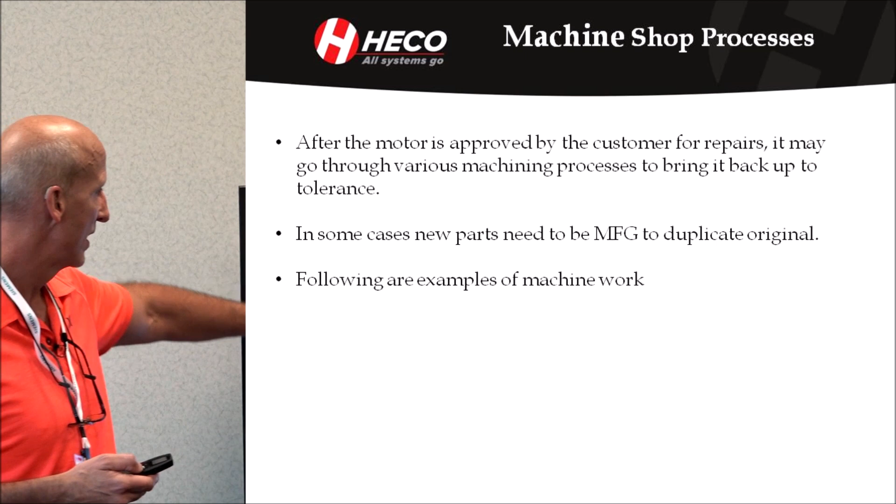After the motor's approved and cleaned, it may go through various machine shop processes. In some cases, new parts are needed. Following are examples.

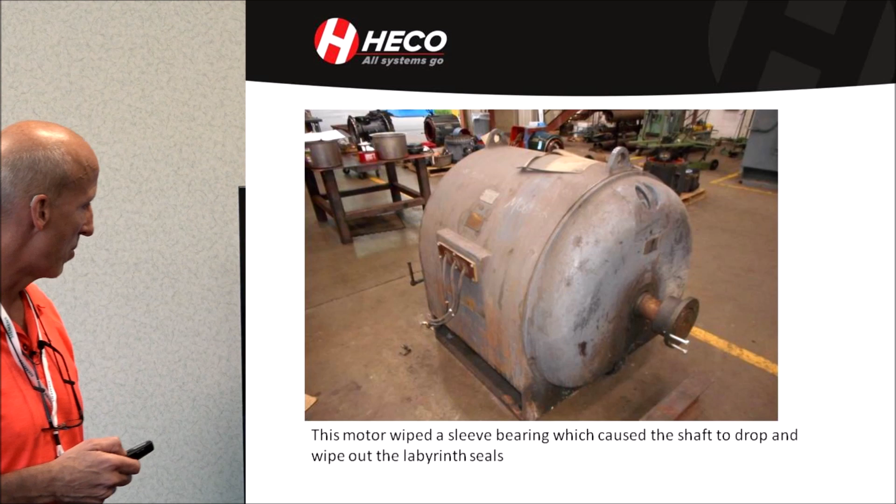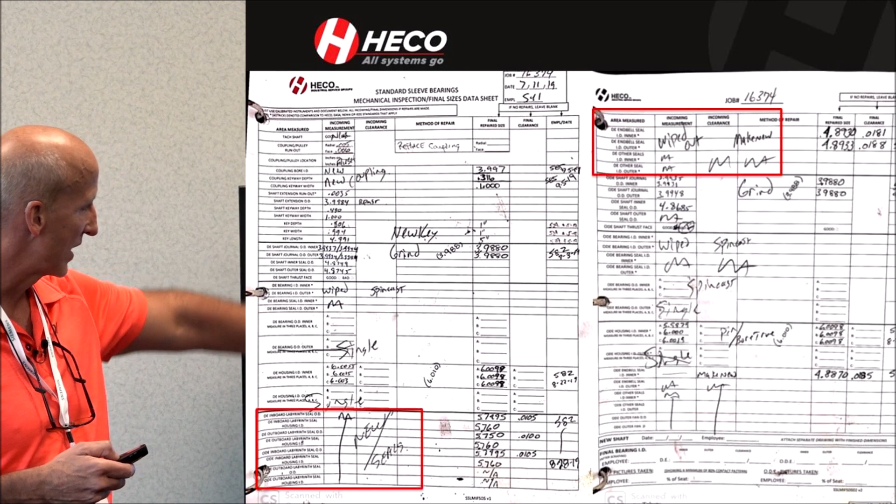This is a motor that came in with a wiped sleeve bearing. It took the seals out, and we're going to focus on that again. Documentation, pictures of the actual motor—I think it's the same motor we were looking at a minute ago. You can see where the seals are wiped.

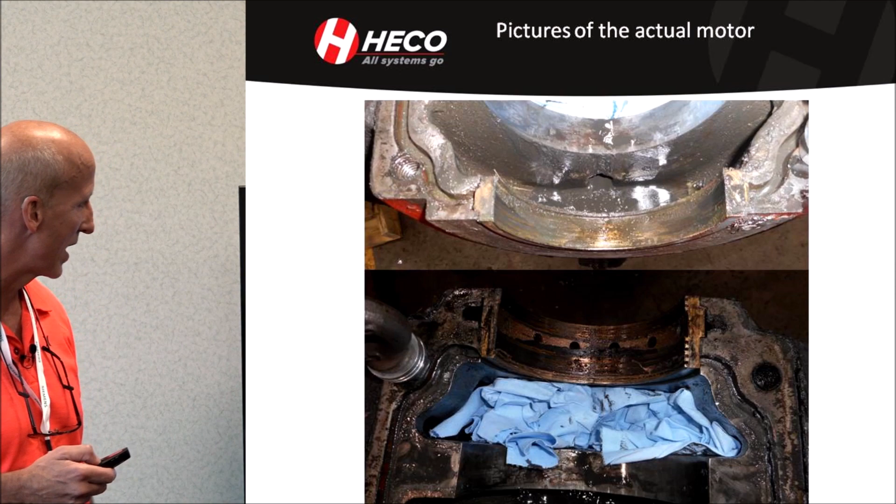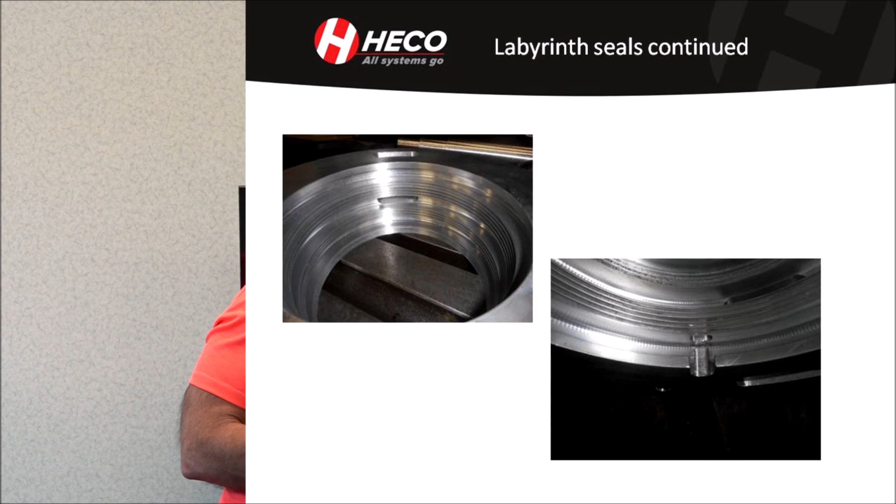Manufacturing new seals out of raw material, right down to the fine details of putting in oil return grooves and holes, so that when oil gets into the labyrinth seal, it has a way of getting out by returning back into the motor.

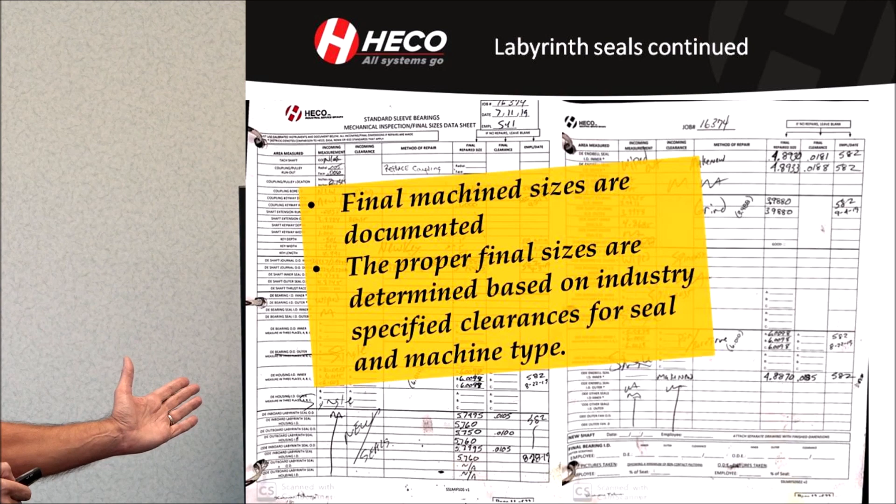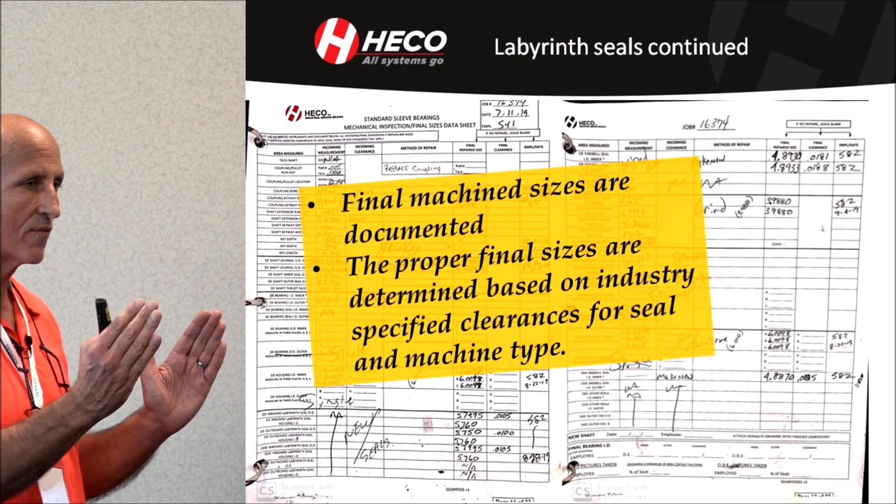Final machine sizes are then documented. On this form you have the incoming sizes, the repair method, and the final sizes. We like that because it's all on one form—it allows us to see the whole activity of the repair in the mechanical aspect.

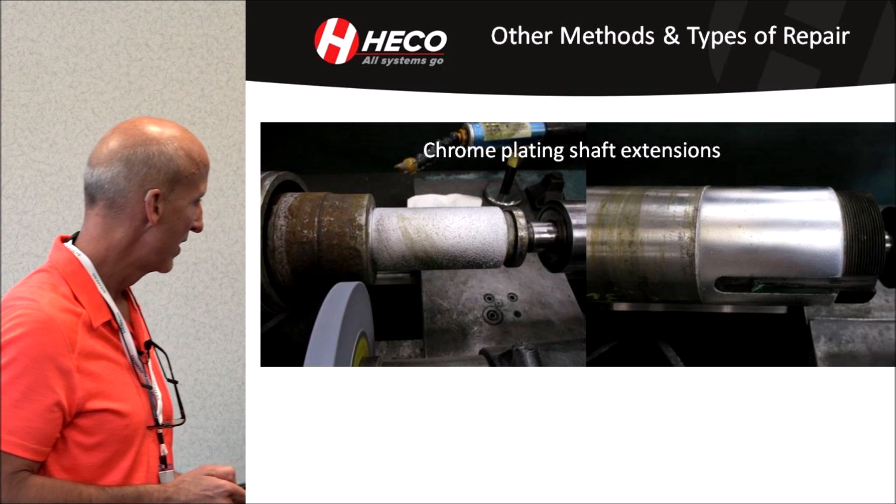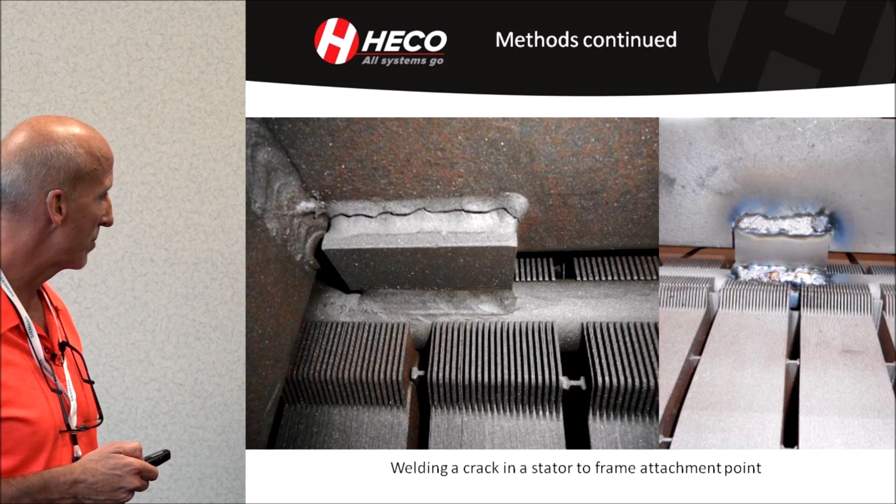Other methods of repair: we might chrome plate a shaft extension and then grind it, or repair cracks in frames—just showing some simple things we might do. Of course, identifying the materials and making sure we're following the right weld procedure is really important.

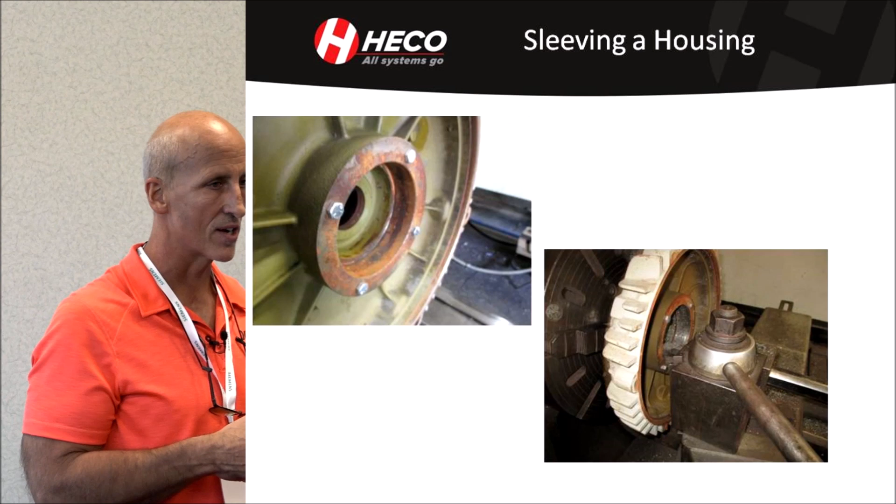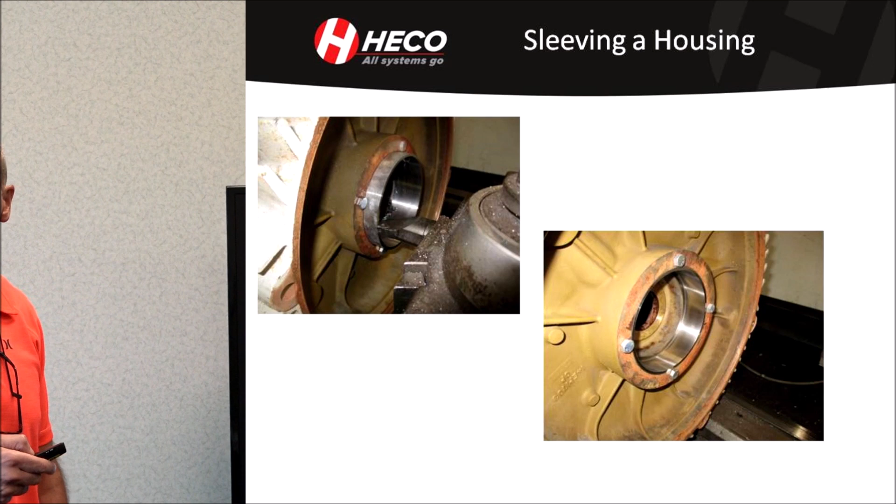Sleeving a housing is very common for us, for smaller motors and even larger ones—boring out the housing, putting in the sleeve, shrinking the sleeve in, and then cutting it to final size, to the bearing tolerance charts predefined by the bearing manufacturers.

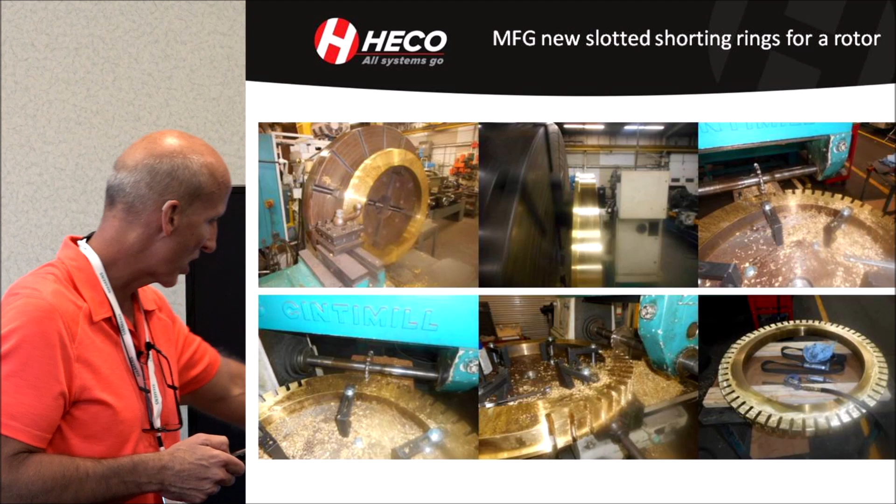This is just a quick blurb. Some of the images are blurry, but it's a slotted shorting ring for an induction rotor—identifying the alloy, machining it, and then cutting the slots in the shorting ring.

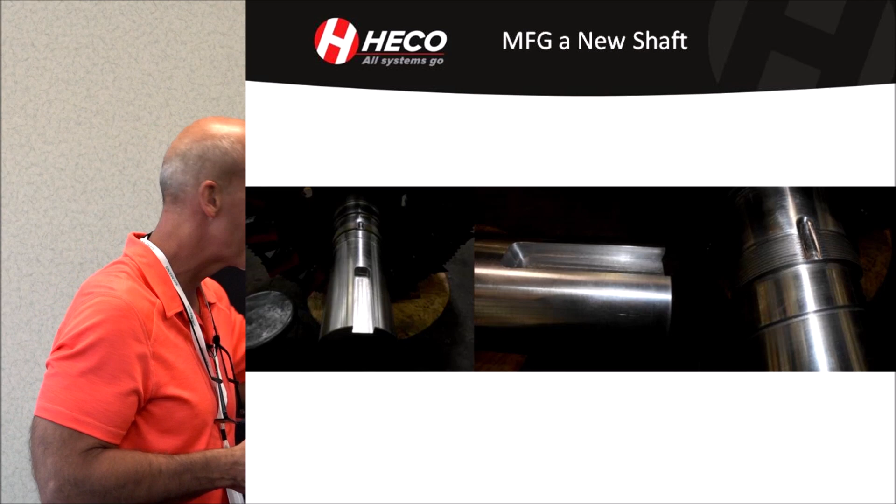Manufacturing a new shaft, starting with a print—just a quick fast track through machining it down close to final, cutting the keyways. Here are the steps to manufacturing a shaft: make a shaft print, identify the original material.

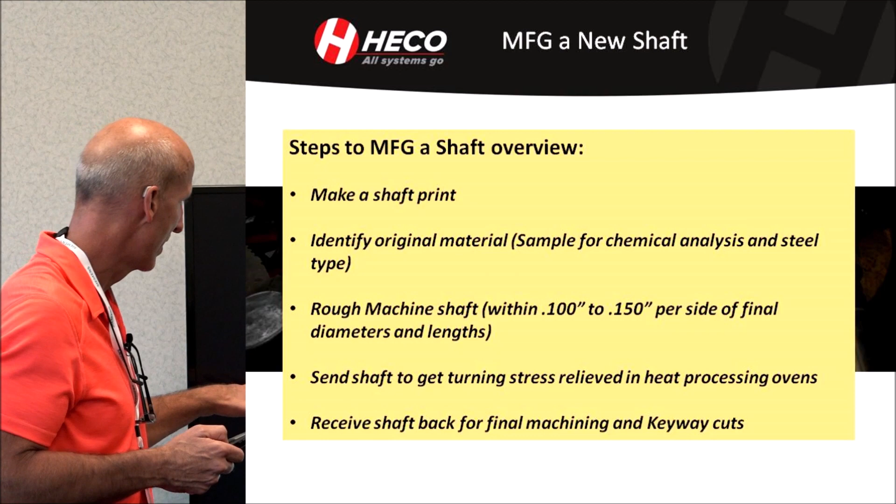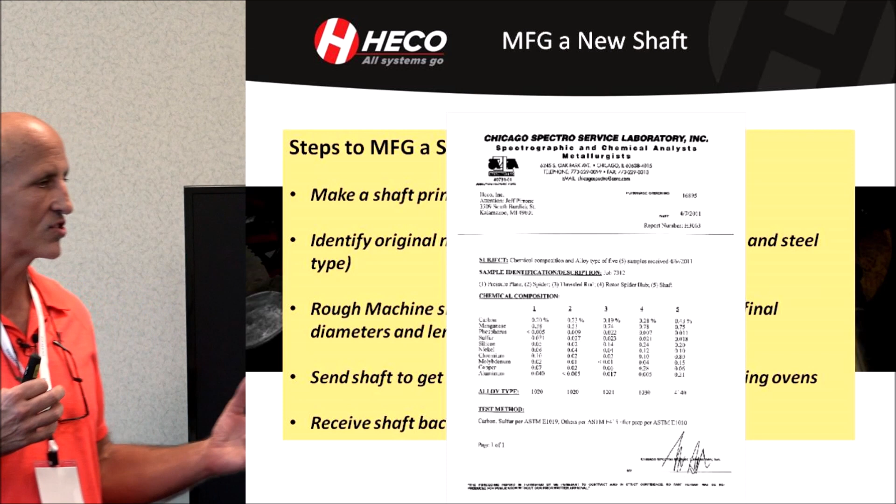We drill into the end of the shaft to get material, typically, and send those filings to a lab like this one, where they identify through the chemistry of the metal what we're dealing with—was it 1040 steel or 4140 steel? So that we can either duplicate it or know what you had, and we typically recommend putting in something a little better, like 4140.

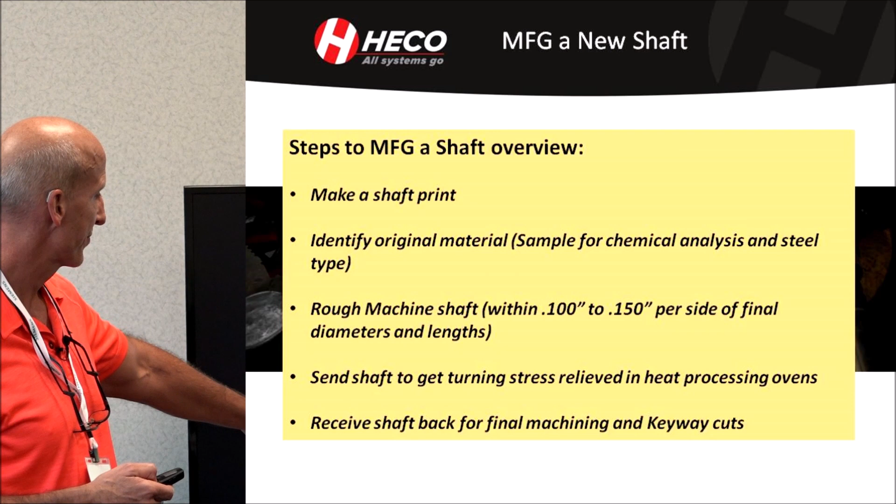Rough machining the shaft to within 100 to 150 thousandths, but not finishing it, and then stress relieving it in a heat processing oven. This is a very important step—if you just turn that shaft down without going through proper stress relieving, it will look good today but will actually move in service. The stresses will relieve and you'll end up getting a run-out in the shaft.